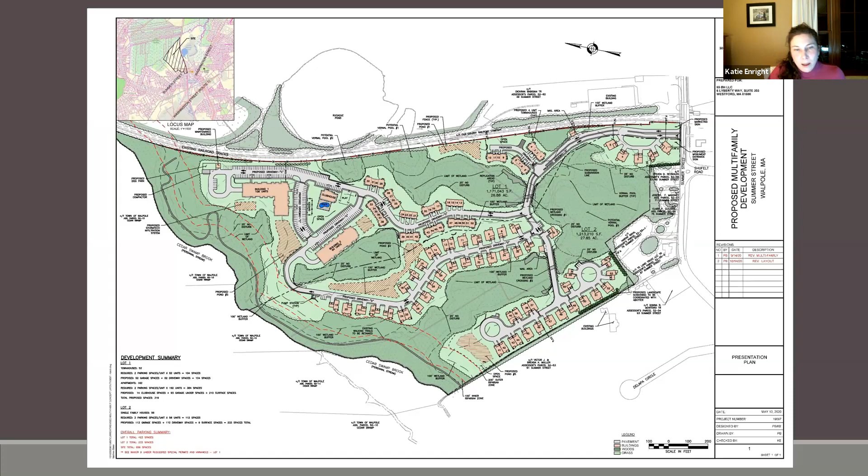So all really important changes as we work through the Conservation Commission's comments and questions and the peer reviews we've seen there. We feel we've made a lot of really good overall adjustments to the plans. As you move to the next picture, Leslie.

This is just a breakdown of the unit mix. As I stated before, we've moved 4 units from ownership to the rental townhomes, but we're still at that 300 number. What we've done is we've introduced 6 studio apartments into the multifamily area.

Still 192 apartments. We've just changed the mix slightly to offer a little bit more variety in the overall multifamily. So it brings you through the number of 1-bedrooms, the number of 2-bedrooms in both the multifamily, and the 2s and 3s in the rental townhomes.

The ownership units are now separated into 2-bedroom standalone, 3-bedroom standalone, and then a 2-bedroom duplex and a 3-bedroom duplex.

If you move to the next slide, I know it was requested and we had provided some of these before, but we've updated them as the project progressed. This is an aerial view of what our project would look like, showing the new unit types and the 6-story buildings and their orientation.

As you come into the site, there are the first 5 single-family units on the left, the Boulevard roadway as you come in, then roadway B with the townhomes off to the right. Then you come up onto roadway C, where you wrap around through the townhome units. You can see the trees and the areas of the wetlands, vernal pools, and open and green space adjacent to these units.

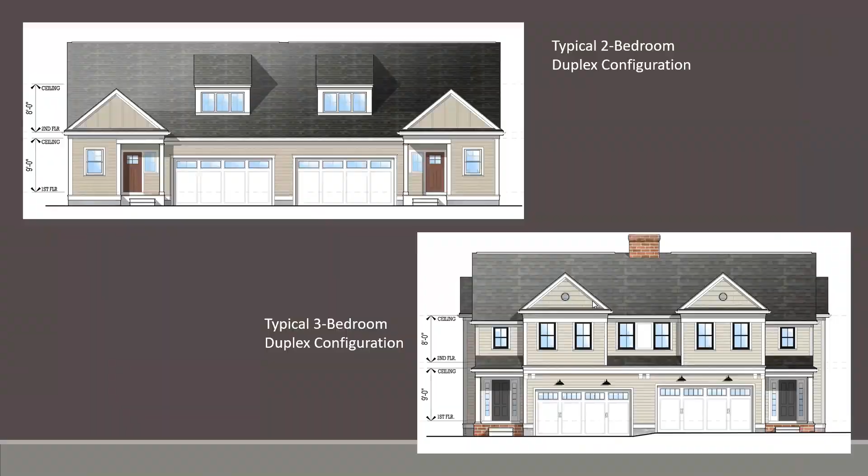A number of opportunities we have to increase the green area and decrease the coverage resulted from taking 2 single units and joining them together as a duplex. There are some 2-bedroom configurations, like the small intimate image you see at the top, and some 3-bedroom units that are taller in massing, but still very much consistent with what the single family neighborhood will look like for the individual homes.

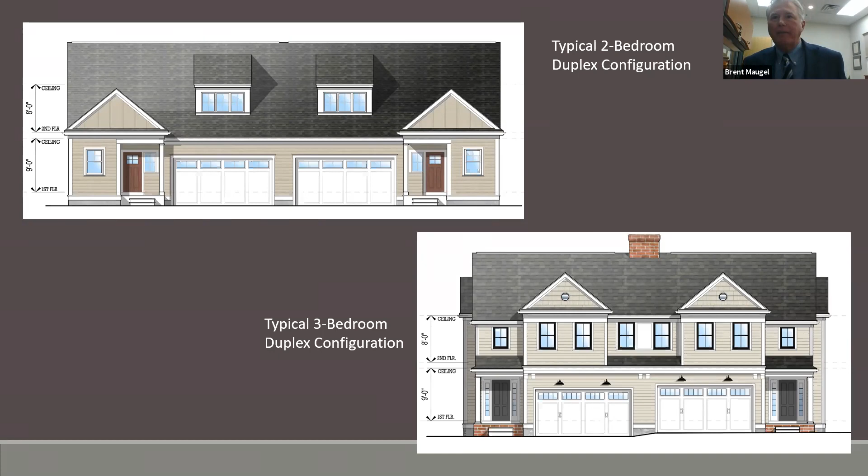The real change in the site, if we can go to the next slide, is the open space Katie spoke about, a direct result of going to 6-story buildings so we can combine 2 into 1 and dramatically decrease the amount of coverage on the ground plane. The image here is of the clubhouse in its new location with almost an acre of green space around it. One of Cliff's comments was that the clubhouse and pool facility did not have an outdoor amenity space, so we've been able to answer that query and successfully so.

This is an image of how the building that is the tallest building at the back of the site is appropriate, given that part of the site is about 20 feet below the entry road into the site, so it's really only going to be about 40 feet above the entry road. There's an abundance of mature vegetation there, trees ranging from 40 to 60 feet, giving a flavor of the environment around the new configuration, which is obviously a dramatically more open space in this design.

One of Cliff's comments was that he thought we could be a little more pedestrian friendly and improve the vehicular circulation around the site. This added nearly an acre of green space, allowing us to do that with properly located sidewalks and a reduced pavement area for the driving areas. So we're very happy about how this is turning out with Cliff's comments and our response to them.

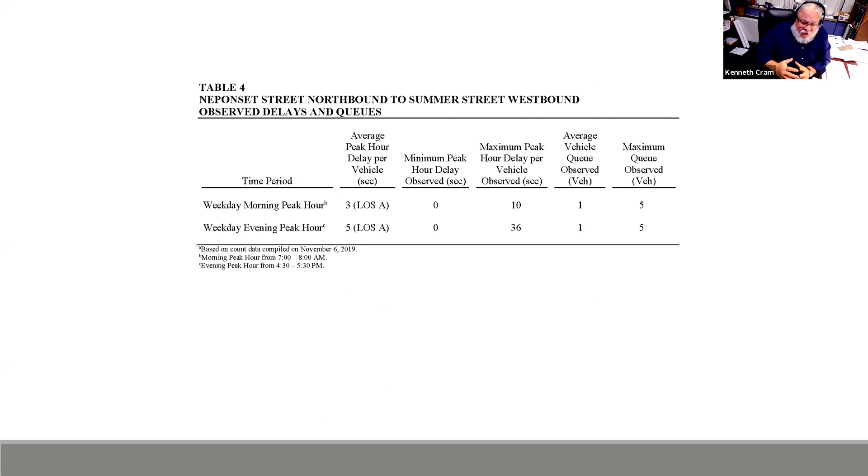Just to give a brief summary—I'll go into more detail later—level of service: traffic engineers grade intersections by levels of service, just like you were graded back in school. Level of service A, of course, being good, and level of service F representing failure. Over the years, the Transportation Research Board, the Federal Highway Administration, and the Institute of Transportation Engineers have broken those numbers down into a range of average delay over the entire hour to associate with a resulting level of service.

At a signalized intersection, if you had experienced on average anywhere between 20 and 35 seconds of delay, that would correlate to a level of service C. But that same delay doesn't relate to an unsignalized intersection. If you had an unsignalized intersection with 25 to 35 seconds of delay, that correlates to a level of service D. So signalized and unsignalized intersections are both graded the same way, but the range of values for those delays are slightly different.

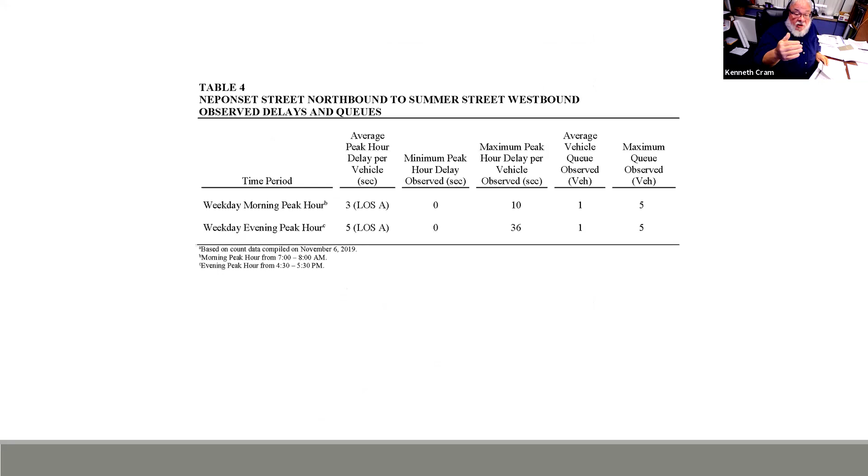So we use this data and the data from the following two tables to calibrate our capacity analysis model, which I will talk about in a few minutes.

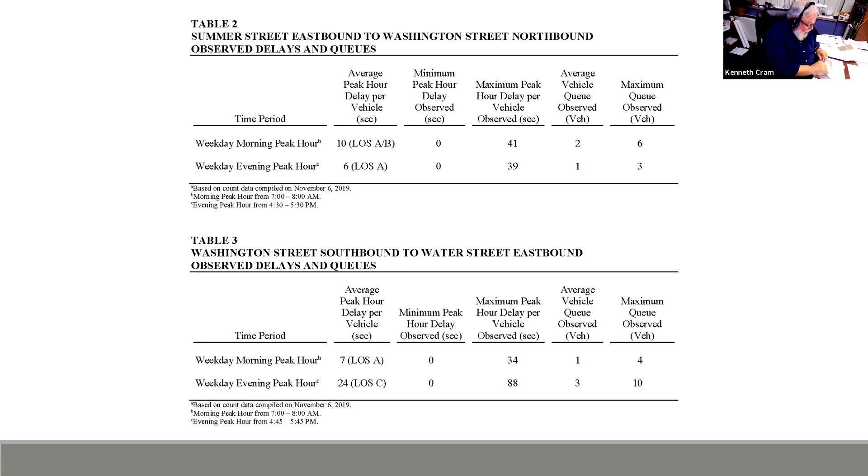So as we go on, we did a traffic study. We looked at crash history. We looked at pedestrian volumes, which I will talk about separately. We looked at Gillette Stadium traffic management, because they have a whole plan that unfortunately is not in place this year.

But I expect that sometime, maybe next year, maybe the following year, things might be back to a new normal. But at this point, nobody knows what that is. I was at a session this afternoon where we had 5 out of 6 of the state traffic engineers throughout New England on a panel, and they were all in the same boat. They all agreed, no one knows what we're looking at.

Traffic volumes in Western Mass, for instance, are still down, but only by about 10%. Whereas here in Boston, based on the state traffic engineer, the volumes are still down by 30%. So we don't know when it's coming back.

So we looked at the crash history, and then we take our existing conditions and project them out to the future. We used a 1% compounded growth rate. This was based on data from Mass DOT.

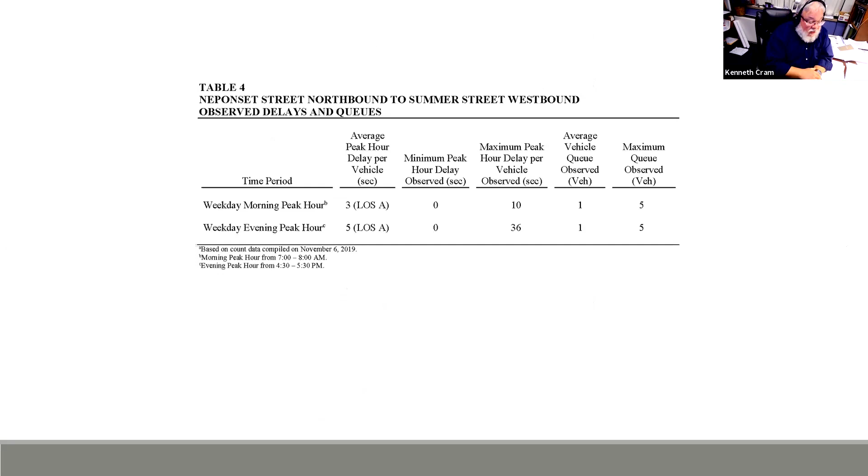And then we contacted the town of Foxborough next door, because we're so close. There were several projects identified, for which we either had their traffic studies or used traffic generation information from the ITE, the Institute of Transportation Engineers, to generate the traffic for these new projects. And we looked at what our project is going to generate, which is summarized on the next slide.

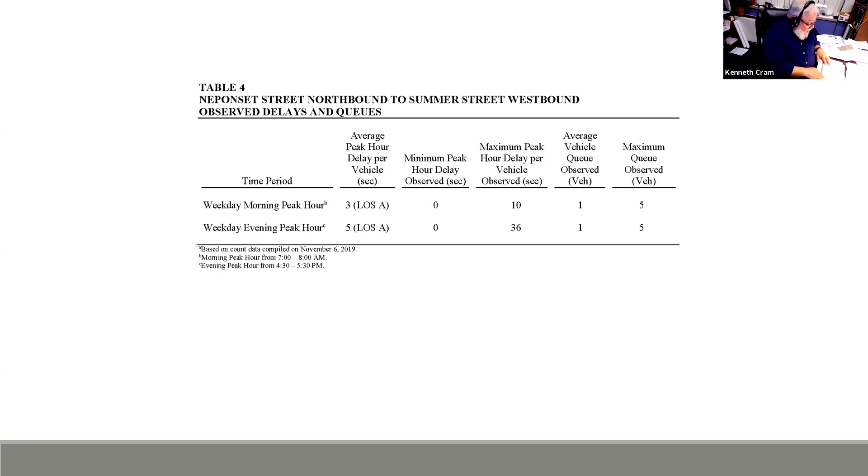Total, we're projecting 2016 daily trips on average. Cut that in half if you want the number of cars, because a car goes in and the car goes out over the course of a day. Based on the unit mix we had at the time, we project 136 vehicle trips: 35 cars entering and 101 cars exiting during the morning peak hour, and 110 cars coming home from work with 66 cars leaving in the evening peak hour.

Those are pre-COVID numbers. We don't know what's going to happen again. A lot of people are working from home, and everything I have read and seen shows productivity levels have actually stayed the same or gone up, which is good. So, these are the ITE numbers as they currently stand.

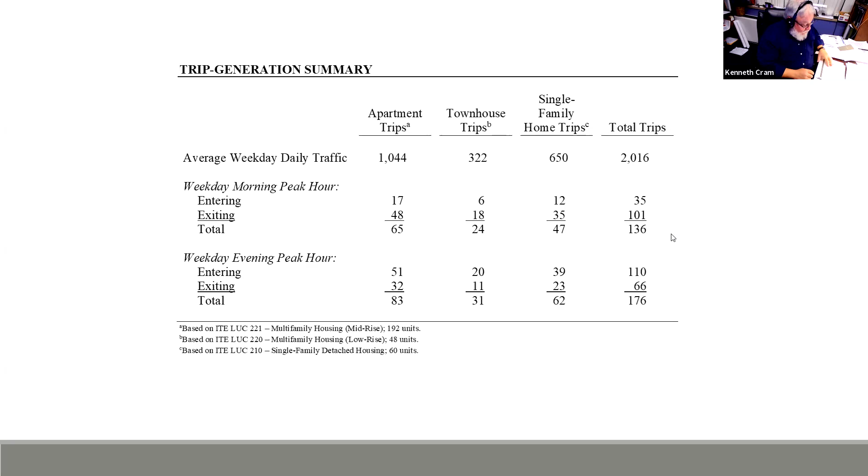So we have our traffic generation, and then we look at where they're going to and coming from. The next slide shows the results of a gravity model we performed. We looked at census data for Walpole, where people live in Walpole, where do they work. We took all that data, put it into a giant spreadsheet, and looked at the best routes to get to whichever town it is that you ended up working in.

No question, it looks like 62% of the traffic was destined to Route 1, either north or south, mostly north, and 21% heading up Washington Street into the center part of Walpole.

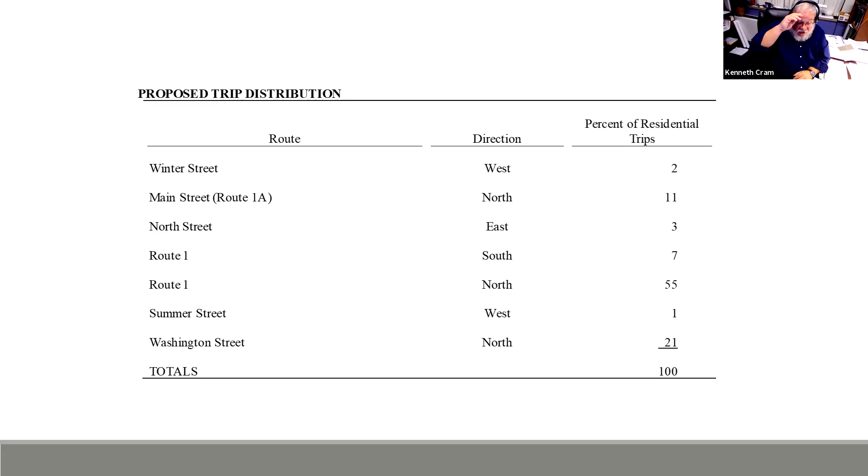So we have our no-build volumes, we have our site-generated volumes, we have our trip distribution pattern. We use a trip distribution pattern to distribute the site-generated traffic volumes, and we add them onto the no-build network, and we get our future build traffic flow networks, which we analyze.

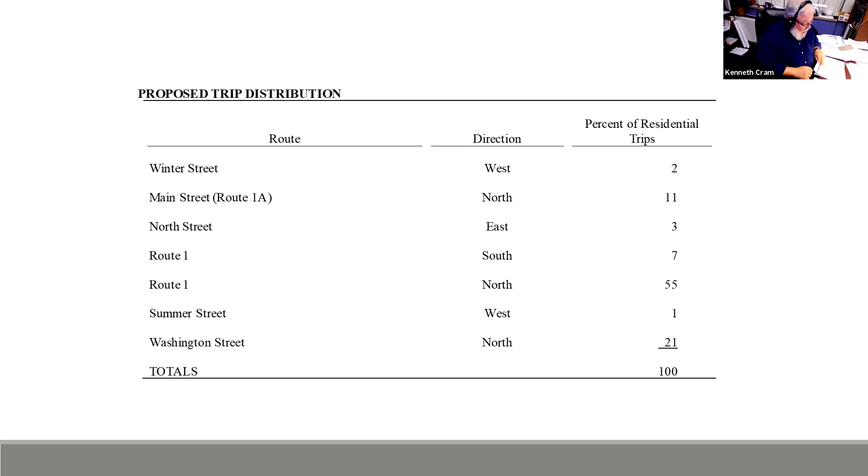Next slide. Here is, as I briefly touched on earlier, the level of service tables, the top being the signalized intersections and the bottom being the unsignalized. You can see the range of delays go from 10 to 80 seconds for a signalized intersection, and 10 to 50 seconds for an unsignalized intersection.

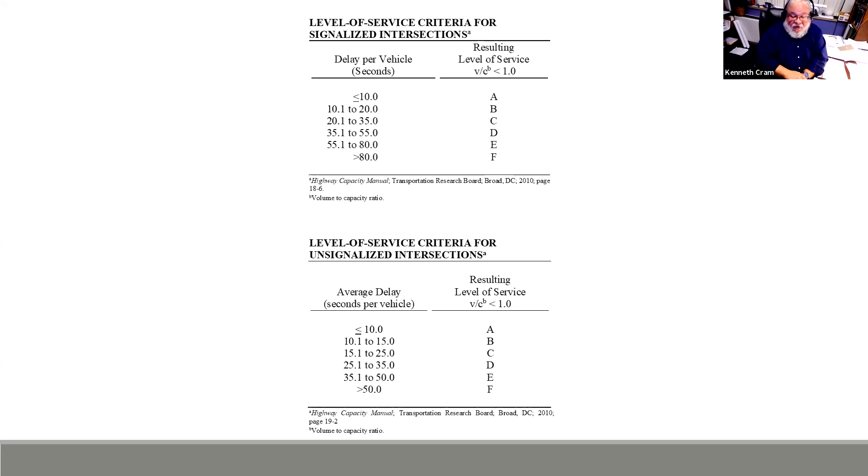That's because it's a weighted average for the delay that gets calculated. And if we add movement volume to a movement that is not the critical movement, but it's one of the ones that helps the intersection operate well, it can actually pull the delay down.

Moving on to the next slide, it's going to be a little bit small, I'm sorry, but this is the unsignalized intersection level of service results. These are the results that when we first saw some of the existing conditions where we had level of service E, for instance, at Summer Street and Washington Street, and level of service F, we said that doesn't match what we observed in the field. We were out there several times during the morning and during the afternoon, both in September and in November, and it didn't make sense.

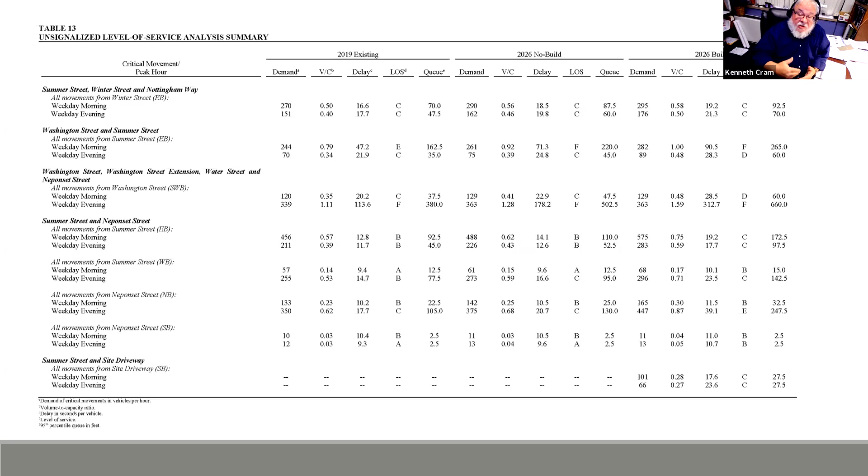So what we did was we went back and recounted in November the intersections at the triangle, and we got the calibrated results, which I presented to you earlier. We took that data, input it into our software model to simulate existing conditions, and then used that data going forward for our analysis. That's summarized in the next slide.

The first column is our actual existing conditions results from the previous table. But you can see the three locations where we actually had information, the level of service, even though it says it's an F right now, the model based on the volumes we counted - when we look at what the actual recorded delays and queues were, it's not an F, it's a level of service C. This shows us that the capacity analysis model and methodology for unsignalized intersections is very conservative.

I have done this many times over the past 15, 20 years because this anomaly, I guess the best way I can describe it, exists in the highway capacity software and the modeling for unsignalized intersections. The methodology for determining level of service for unsignalized intersections has not changed literally in 20, 25 years. I keep hoping every time the new capacity manual comes out that more research would be done for unsignalized intersections to come up with a better model to predict results, but that has not happened.

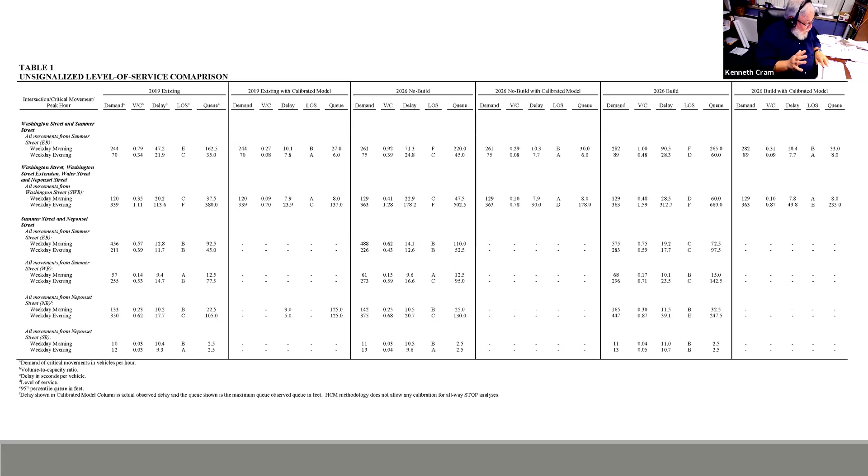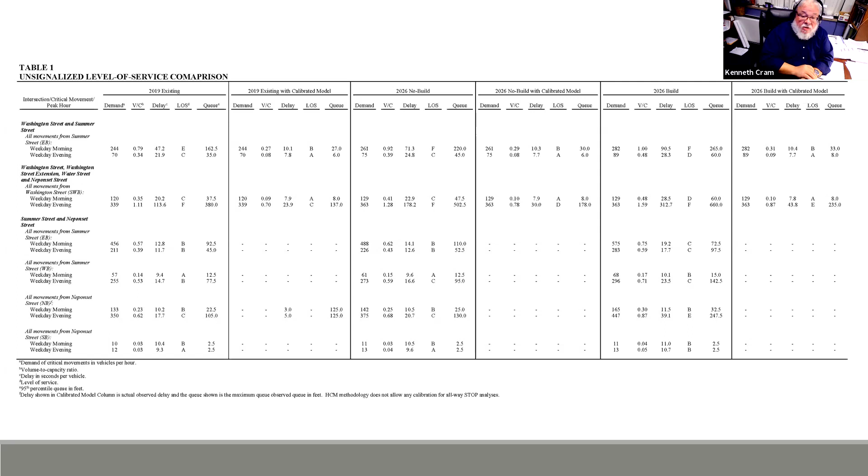So that's a summary of the analysis we did for the traffic study. I'm going to segue briefly into several other topics that we were asked to look at, or there were some questions raised. The first one coming up is the location of the driveway in relation to the railroad.

We've done - I've got to give Mr. Hale credit, he kept on sending me all kinds of interesting reading articles on the railroad crossing, and we found some information on our own. Here is a plan. We also had gone out as part of our effort and did a survey of Summer Street in the vicinity of where the driveway would be down to Neponset Street. This plan shows the railroad crossing right in the middle pretty much, and where the proposed driveway will be.

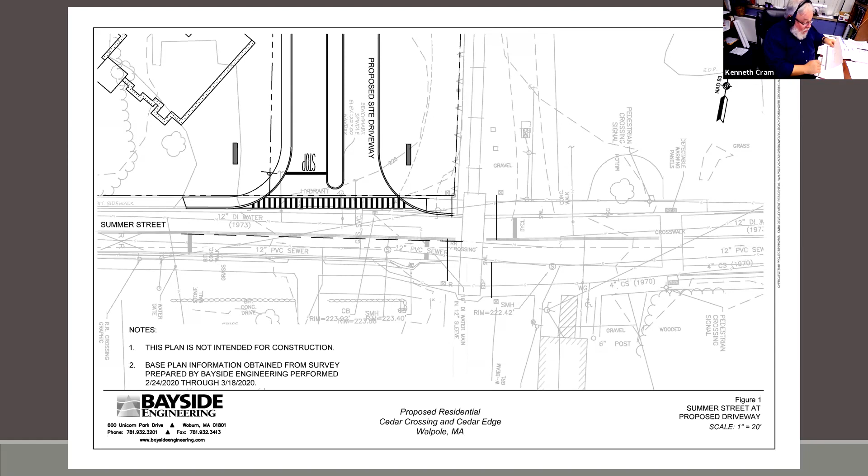We looked at railroad operations. When we did our delay measurements, we also looked at railroad operations at the railroad tracks themselves. We actually went out and, when we did our recording, measured the time it took from when the railroad flashing started to the time the railroad flashing stopped and the arm bars were back up in the upright position.

It turned out that the entire time it took for that operation to occur was about a minute. The range was 58 to 62 seconds. And then we broke it down even further for both northbound and southbound trains, and it was basically just about the same amount of time.

But we also, on the next slide, looked at our measurements recording queues and delays for how long it took vehicle queues to clear after the fact. In the weekday morning period in the westbound direction, the average westbound queue was 2 vehicles, and the average time it took for that queue to clear was 10 seconds.

In the evening, it was a little bit longer, about 26 seconds in the westbound direction, and the queue was slightly longer at 8 vehicles.

Keep in mind, there's about 10 trains a day that were running from Foxborough, Gillette Stadium, up to Boston. That service has now been suspended due to lack of ridership. I could definitely point that as a result of COVID.

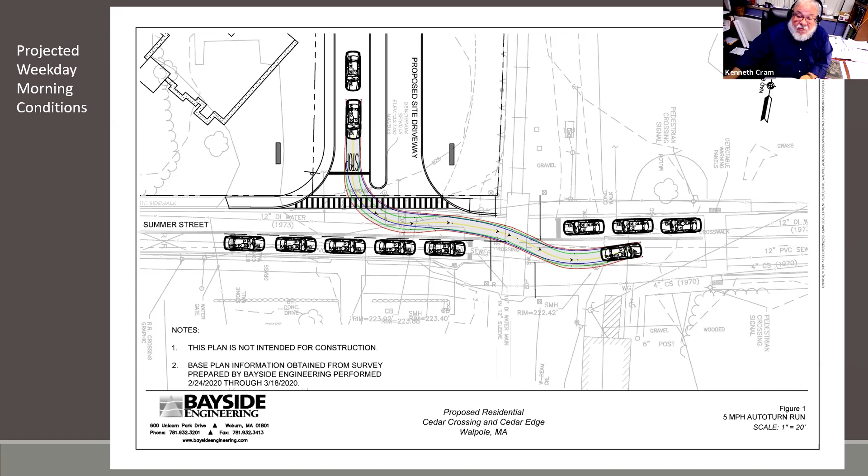Next, what we did not do in our original traffic study, but the town engineer, Carl Baldoff, asked us to look at, was pedestrian activity. When we do our traffic counts, we always count pedestrians and bicycles, but generally, unless you're doing a project in a major urban area with 10-foot wide sidewalks and a lot of pedestrian activity, we don't report on it. But he asked us to, and we did.

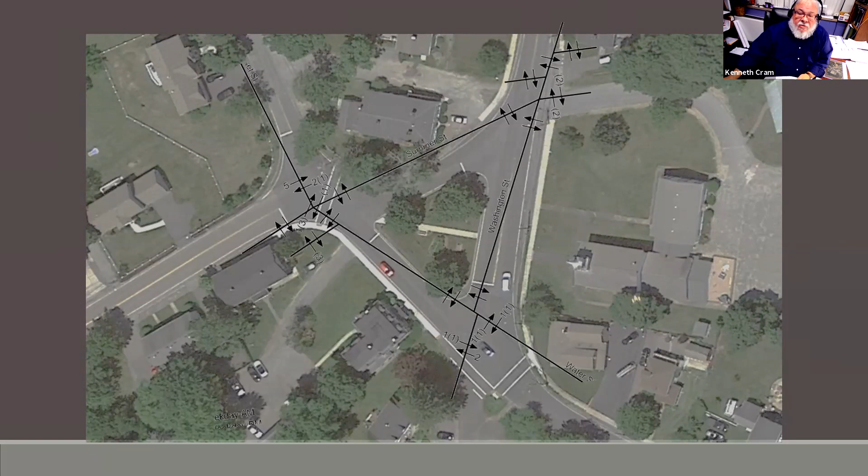So on the next 4 slides, we summarized the traffic volumes from the count data worksheets. I think the largest pedestrian crossing volume we saw was 7 pedestrians. I believe it was on the next slide, Leslie.

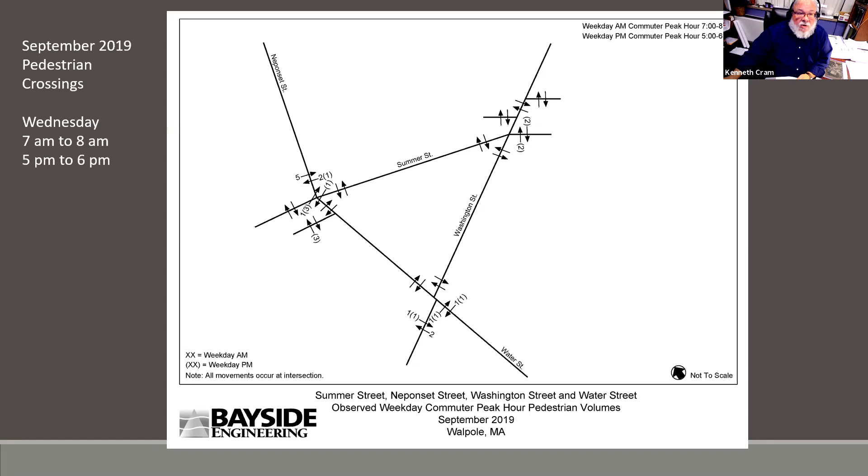We surmise that they either went into the church building on the corner or continued down Water Street, because if you look up to the next intersection of Washington Street and Summer Street, during that same hour, 8 to 9, no pedestrians were observed crossing the driveway at that location. So the pedestrian volumes we observed, both in September and in November, were very low.

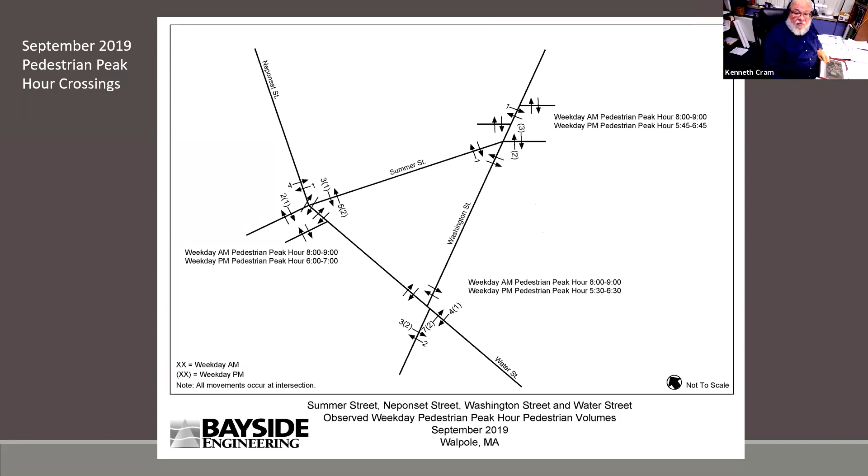That's just another picture showing the triangle intersections. I believe David Hale will be finishing up with our last slide.

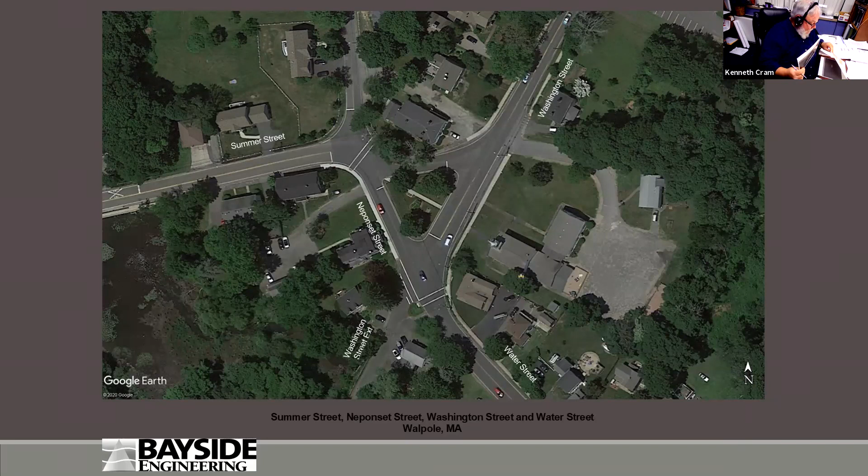So I think what Ken has presented is sort of a scientific approach to traffic, which is his job. And I think the result is that although the project will generate additional trips, it won't generate significant safety issues or failures of any of the existing infrastructure.

That being said, we are committed to join the Neponset Valley Transportation Management Association upon occupancy, and that association has some capabilities to help us arrange common commuter transportation to the train stations and some other things aimed at reducing traffic.

We're also committed to provide funding of $131,625 on the same per market unit basis as Liberty Station and 95 West Street toward off-site infrastructure. You might remember that both of those projects committed $100,000 either in cash or in kind to off-site infrastructure, and that on average, one project was 150 units and the other 192 units. So that's an average of $585 per market rate unit.

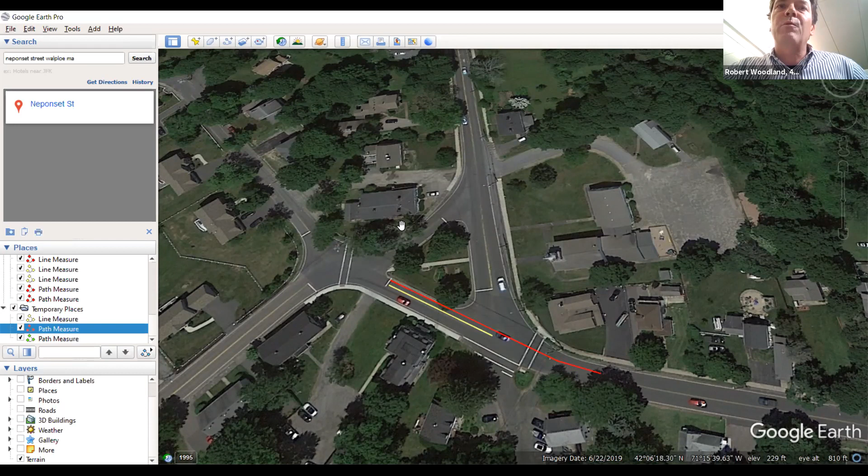So what we were looking for wasn't necessarily to install a traffic signal, which might have been a potential solution. We were looking for a solution that would address the vehicles trying to get through this intersection. Zooming out, the bulk of their traffic will be heading through these intersections, and in the PM most of those vehicles are heading back from the highway, turning onto the street and into the driveway here, which results in this queue spilling back at the intersection.

So we were looking for some type of improvement they could identify to address these capacity issues with the unusual layout of these intersections. You have the triangle intersections here and an additional leg coming off here. You had the pedestrian crossing here because of the lack of sidewalks, crossing diagonally across the intersection, which isn't typical.

I think that's partially alleviated if sidewalk was constructed along this side of the street. A new crosswalk and ramps tying in with a complete sidewalk completion of this portion would get you a viable walking path to the school, coupled with a flashing beacon or police officer control, whatever supplemental crossing would be warranted in this location to get the kids to school, would address one of our concerns.

But the vehicle queue spilling back on this approach is something on the order of 500 or 600 feet. So there's already going to be frustrated drivers passing through this intersection who will accept shorter gaps in the traffic flow. They'll force their way into traffic when operations push up against the capacity of the intersection. And we were looking for some kind of improvement.